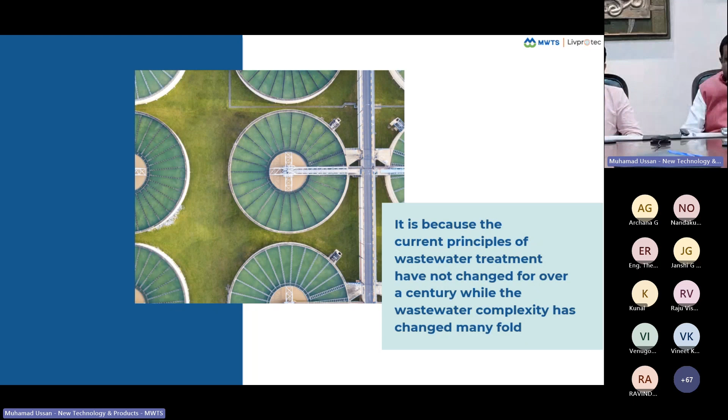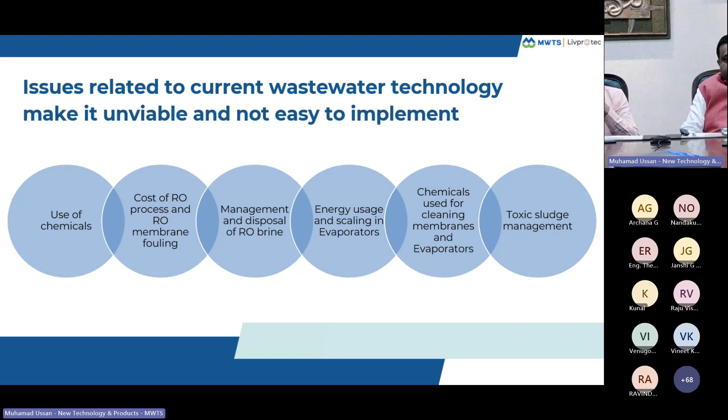So we know more about these issues related to current wastewater technology, and it is not easy to treat the wastewater. Already I have explained the complexity associated with that. In the present technologies, we use a lot of chemicals to treat the wastewater. The cost of the RO process and RO membrane fouling is the issue. Management and disposal of the RO reject is the issue today. Energy usage and scaling, a lot of energy requirement when we use the evaporators, is the issue. Chemicals used for cleaning membranes and evaporators is definitely a big issue.

And more than that, we have to manage the toxic sludge. Toxic sludge management is the issue. So there are so many issues associated with the present wastewater management. Somehow we were adopting it, because we need to achieve certain norms, we need to meet the growing statutory compliance, and also as a part of sustainability responsibility we have been doing it. But there is a way to achieve everything in a different way. That is what we are going to present.

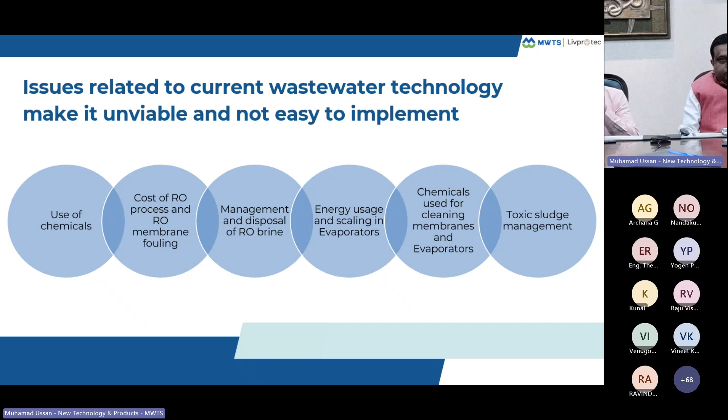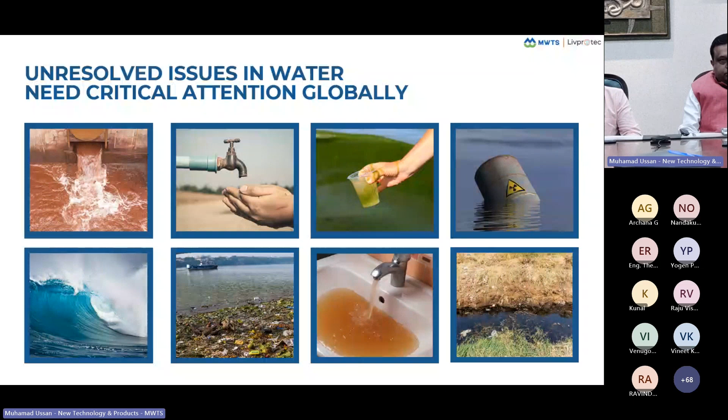So basically, unresolved issues in water need critical attention globally. That is what in one sentence we want to tell. How the critical attention can be narrowed down by means of technology, by means of science, and by means of disruption will be explained in the coming slides.

We know that the sustainability index, whatever we are talking today, water is essential for corporate sustainability. Water is the major contributor for the sustainability index when we talk about manufacturing organizations or any service organizations or the hospitality industry. In the corporate sustainability model, if you see, water is coming in almost 8 different headings. So that shows how important water is today worldwide. So everybody is inclined towards how to recover the water in a usable way.

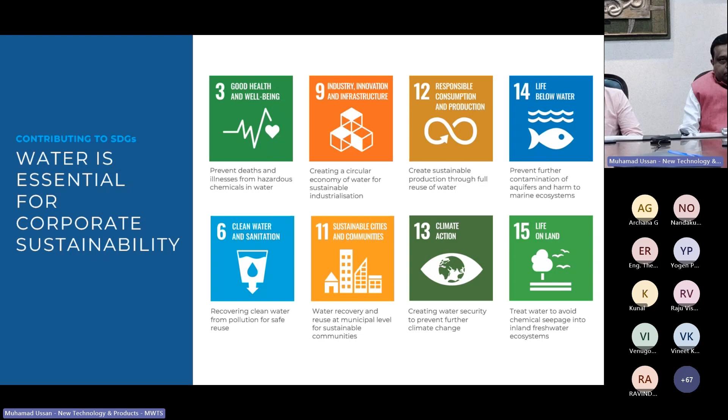So basically, it is towards achieving the corporate water goals. Water companies to pay out almost 114 million pounds after missing performance targets. We have seen a lot of penalties coming today worldwide. Not only in India, even outside countries, Western countries, US, a lot of penalties are coming on companies for not meeting the water targets or not meeting the regulatory norms. So it is going to be stricter and stricter. That is why better technology is the need of the hour.

Effective and safe wastewater treatment is one of the unsolved problems facing humanity, and can only be solved with disruption as well as innovation. That is what we are going to talk about: the solution for the one which remains unresolved. So today, whatever technology we are going to explain, this will more or less explain everything that is needed today.

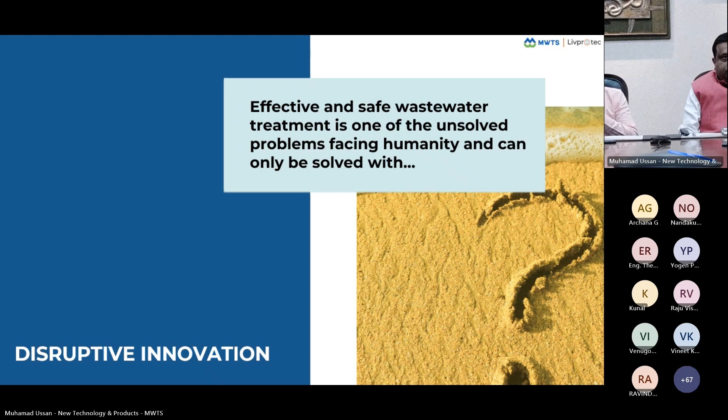So hence, we are introducing nature restorative technologies. That is called Aquatron, water recovery system, or as they rightly told, water time machine, using patented FP-STAR technology. What is FP-STAR? F means fine, P means particle, S means short wave, T means thrombotic, A means agglomeration, R means reaction. Fine particle, short wave, thrombotic, agglomeration, reaction. In total, it's a patented technology.

FP-STAR is a principle because we convert all the dissolved compounds, dissolved molecules into their elements, and these elements will lose the counterpart, that is anions, and they will become chargeless, and they will get thrombolytic. Hence, they will join together by means of van der Waals forces of attraction. That is called agglomeration. Everything is happening in a short wave frequency. That's why it is called fine particle short wave thrombotic reaction. It is a patented technology, and I will explain how it works.

Aquatron is a revolutionary technology that uses principles of physics. We invented it in the year 2017. This is the first technology which came into the world based on the physics principle. And we were ahead of time when we invented this, because everybody knew how the technology works using chemicals, or physical separation, or biological oxidation followed by reverse osmosis or evaporation to achieve ZLD. Nobody thought this particular target can be met using physics principles.

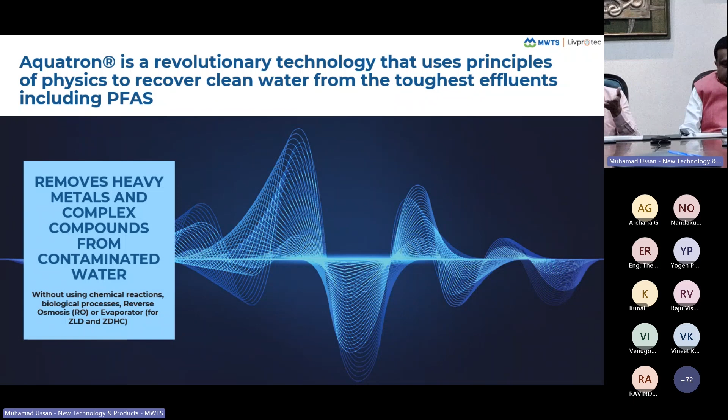I will just touch upon the principles involved in this technology in the different pictures. The entire technology is based on the principle of resonance. Why we adopted the principle of resonance is that in nature, it's a natural process. There is a frequency of association between two elements. For example, if you are getting copper sulfate in nature or iron oxide or iron sulfate in nature, it is not created by human intervention. It is naturally created by nature by means of frequency of association.

At the same time, there is a frequency of dissociation, because when we see river contamination today, the way we have contaminated the rivers for so many years, by this time no river would have been fit for consumption in any way, even after adopting any type of technology. But that is not the truth. Today, whatever river after pollution, when we measure, the TDS will not be more than 500 ppm. The COD will not be more than 50 ppm. How does it happen? It's called the self-assimilation capacity of the river. There is a technology, nature's technology, which is continuously working to clean the water on its own.

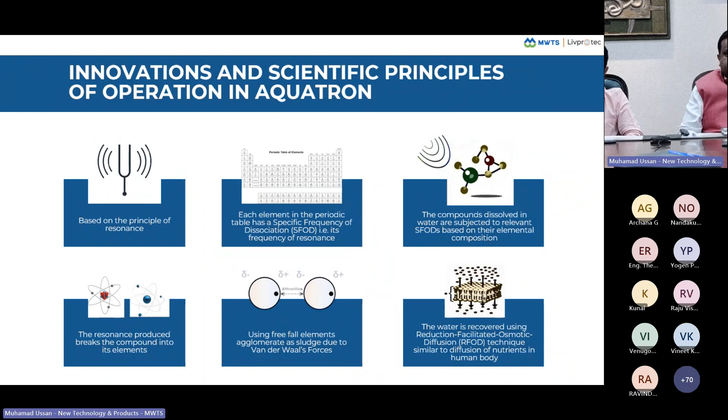So we will explain what a typical effluent treatment plant looks like using this technology in the coming slides. Yeah, just one, Doctor. So again, what we are seeing here is the slide which talks about the core of the technology, because we all know the challenges of contamination of water across different streams, whether it is river, lakes, or groundwater, or even seawater. So again, this is very basic elemental physics. This is nothing rocket science or out of the world.

Only thing is the IP or the patent is mastering or mimicking the laws of nature into a commercially offerable solution. That is how I would put Aquatron or water time machine, whether it is RFOD or van der Waals forces. This principle has been there across different applications. So nothing that this whole technology has invented. We have used what has already been there, and how do we provide it to the industries or to the communities at large, for different applications. Like I said, this is a platform technology.

Many times we are asked whether this is okay for this application or that application. I would put it this way, that the Aquatron or water time machine, like the river, doesn't discriminate. It just follows the simple basic laws of physics. Physics is the same in India or elsewhere, right? So the machine will only look at what is the contaminant I need to dissociate, and it will continuously, consistently work.

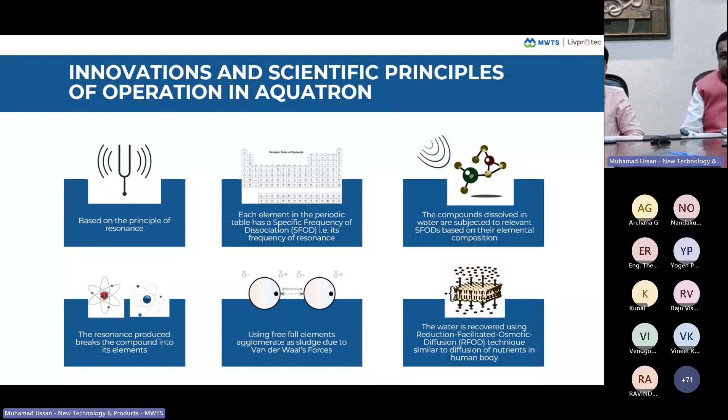At times it's boring because it doesn't give you the challenges of high pressure in RO, a feed pressure increase or a membrane failure, or, like doctor mentioned, the scaling in the evaporator, but this consistently delivers high quality ORP negative pristine water. So that's a beauty. So doctor, again. Yeah, I definitely agree with you.

Next slide. So here we try to explain what happens inside the resonating column when we send the frequency of dissociation, in three different pictures. All three happen at a time in the same resonating column, but we are differentiating them in pictures. So the Aquatron process removes all dissolved impurities and delivers ZLD and zero discharge of hazardous chemicals without using multi-effect evaporator or RO process. This is the definition of our Aquatron. So how the principle takes place in a resonating column in three different ways.

The first one is contaminated water which goes inside the resonating column, contaminated due to dissolved compounds. It may be organic or inorganic compound or a pathogen. They are all dissolved compounds. Based on the elemental analysis of this effluent, we fix the frequency of dissociation, and we send these frequencies into the water with the help of antenna. There are 12 sets of antenna in each tower. It is just like a TV antenna. It will receive the frequency, because the frequency we operate is short wave, and send these frequencies into the water.

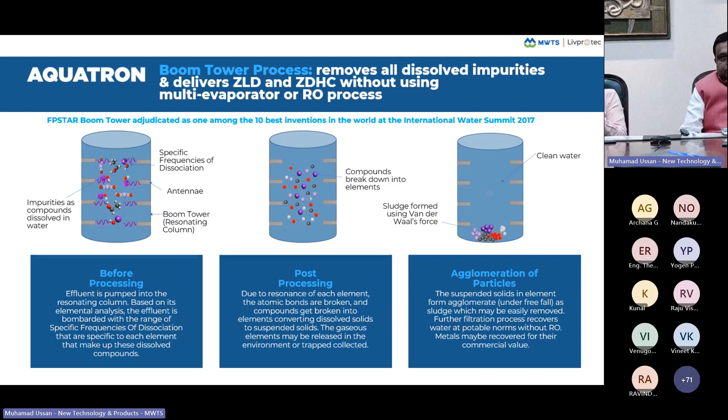They are all what we call inorganic elements or inorganic chemistry elements. These compounds will be broken down into the elements, and these elements, as told in the previous slide, basically lose their weight and become weightless. Due to the van der Waals force of attraction, they attract each other temporarily and start settling. Settling means they need filtration. If they are clogged, it can be filtered out; if not clogged, they cannot be filtered because they are very fine particles, so they need agglomeration. Once agglomerated, it can be easily filtered out.

So as Jay was telling, this technology is a platform technology. It doesn't discriminate which type of effluent is coming, which type of industry we are talking about, whether it is seawater, sewage, industrial effluent, or groundwater treatment for contamination of heavy metals. We are not worried about that, because whatever chemical contamination we talk about today, they are part of this periodic table. So we know the periodic table, and we can produce all the frequencies for all the elements present in it.

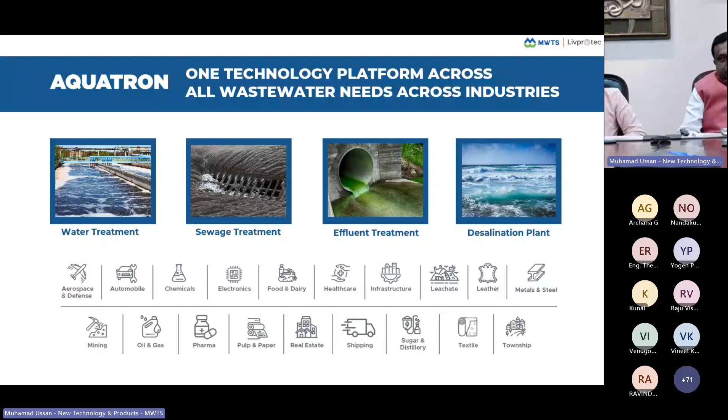Hence, we can treat any type of effluent coming from any type of industry in the world today, or any hospital, service industry, hotels, sewage, or even desalination. Even for desalination, we will explain how our technology works in a very different way compared to present desalination technologies.

So when we talk about Aquatron or FPSTAR technology, it is not only about meeting the regulatory norms. Anybody who is adopting this technology will have double benefits. One, no doubt, everybody has to meet the law of the land regulatory norms. Other than that, they can achieve circular economy of water. It is a pioneer circular economy of water, because whatever water you send into the Aquatron, you get the total quantity of water back after recyclation. So the entire water can be reused and recovered. In most cases we produce IS 10500 standard, what we call at par with WHO standard.

It is pristine drinking water, potable water. I will talk about the ORP negative, oxidation reduction potential negative water. This is maybe the cheapest way of producing ORP negative water. If we had to produce exclusively ORP negative water, we would have spent a lot of money, but here it happens on its own. That is the main effect, or a side effect, whatever we define it as. That is the beauty of the technology.

This is the only technology that removes heavy metals and hazardous chemicals with ease. Today we know we have to remove heavy metals or hazardous chemicals, and it is very, very difficult. We have to spend a lot of energy, a lot of technologies, a lot of complications in the operational area, as you will see. But here it can be removed very easily, in a very simple way.

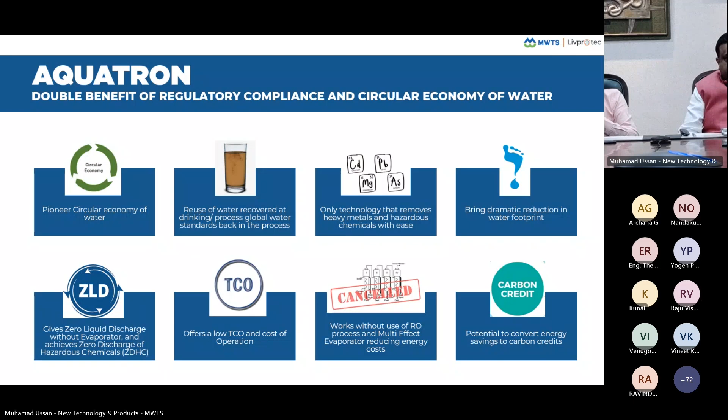So it brings dramatic reduction in the water footprint. It gives zero liquid discharge without the help of RO principle or evaporation. Because this technology runs at very low energy, it offers a low total cost of ownership and cost of operation. Suppose somebody runs this plant for 3 to 4 years, they would have gained all the benefits in terms of carbon credits, operational efficiency, meeting regulatory norms, and meeting sustainability index and global norms. All these things can be addressed with only one treatment technology.

It works without use of RO process and multiple effect evaporator, hence there is a very high level of reduction in energy cost. And as I already told, there's potential to convert energy savings to carbon credits. That is the biggest advantage in this technology.

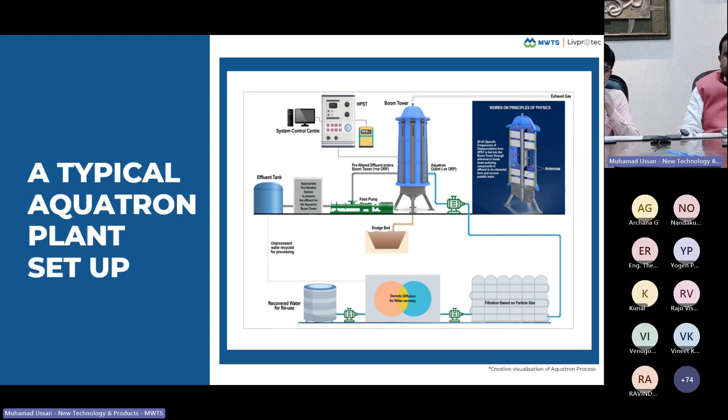So with all this, the approach - again, what we are talking about when we say we don't require an evaporator or conventional separation processes - is simply because, in layman's language, the Aquatron water time machine converts TDS to TSS. That's the easiest and shortest way to explain this. When we say TDS to TSS, that is why it is converted to elemental form.

So this is just a comparison, based on our experience. You could see, like Dr. explained, significant reduction. What we have done is compared FP Star or Aquatron water time machine, the highest in terms of numbers, whether power or otherwise, versus the possible lowest among existing approaches to different challenges. We compared it to multiple effect evaporation, though there are multiple other advancements also. So this is just for academic purposes in terms of what we have done.

But practically also you could see that, like we explained, this is the only technology which uses the principles of physics. The most important thing we have seen is what we call out-of-box thinking. That word has become cliched, people just throw it around without understanding what out-of-box really means. But I would say FP Star, or water time machine Aquatron, is a completely new box. Because out-of-box normally would mean using chemical, biological, biochemical, or some green chemistry approach to solve the unsolved problem. But we are completely changing that because we are using the principles of physics. That is how I would put it.

And again, the operating cost — because we don't have any chemicals to use, the only utility we use is power, and that depends on the power cost, which can vary from different countries or geographies. Again, in terms of area, we don't require much. The other important thing here is there are three things we would bring to the attention of everyone.

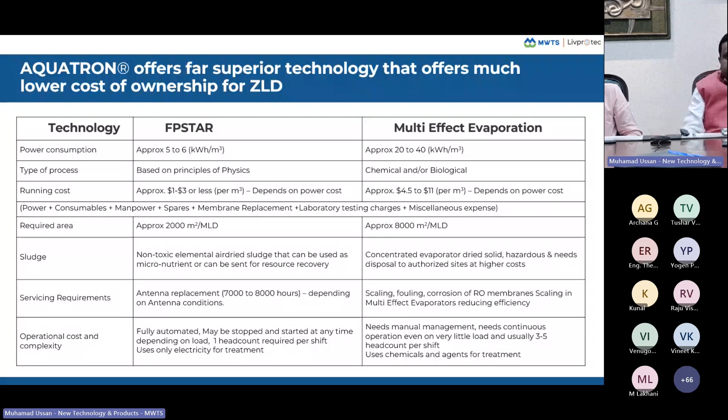This is a continuous plant running. There are two plants we have already installed in Bangalore, India, and they are running perfectly. Leachate is otherwise a very difficult effluent to treat with conventional technologies, but we are treating it within 1.5 hours. The water which enters the plant will be treated within 1.5 hours. That is the beauty.

In conventional technology, even a small, very mild effluent will take around 18 to 20 hours to achieve zero liquid discharge. That is the difference. That's why conventional technology needs a large space, whereas here we need very small space. This can be implemented or installed even on the terrace, in the car parking area, in the minus level of an apartment, in a tech park where they want to treat sewage effluent, or even in industries where they want to treat it at the site.

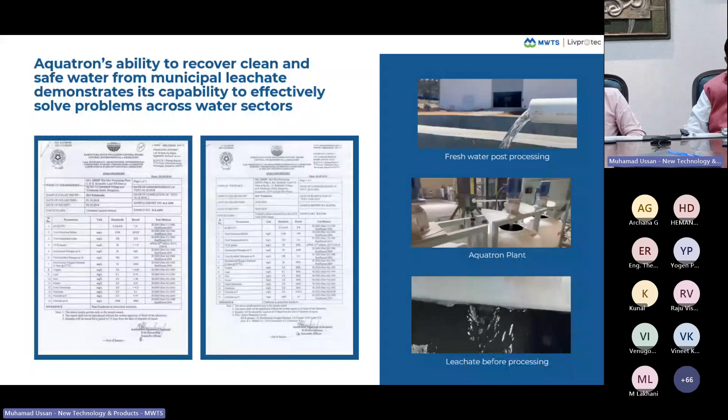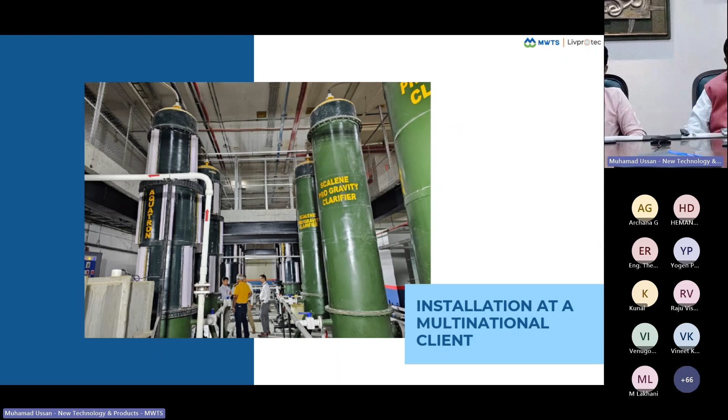So this is a typical - one of the old models. I can say now a lot of design changes have happened. This is an installation at a multinational client in Bangalore. This is how it looks, a 300 KLD plant. It's a very small area, 2,800 square feet. We installed a 300 KLD plant, and it consumed almost 2,800 square feet area, only in the -3 level.

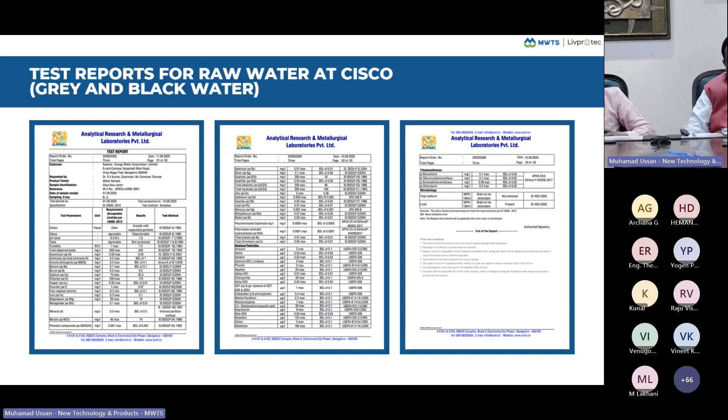This is the test report for raw water at the Cisco plant, especially the gray and black water, that is sewage. It's very difficult to read from here, but we will provide it to whoever is interested.

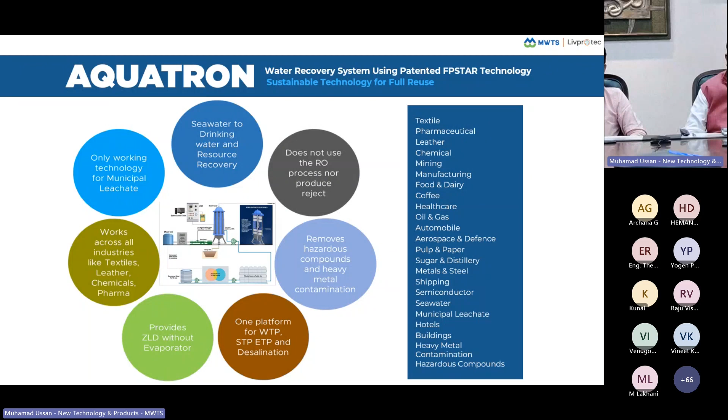So Aquatron, as Jay already told, is a platform technology, hence it's the only working technology for municipal leachate. Seawater to drinking water and resource recovery can be achieved using this technology. It doesn't use the RO process nor produce reject, so it removes all types of hazardous compounds and heavy metals. It's one platform for water treatment, sewage treatment, effluent treatment, and desalination. It provides zero liquid discharge without evaporation and works across all industries like textiles, leather, chemicals, pharma, etc. When we started, we claimed this, and we are again claiming the same thing - one technology can be adopted anywhere based on simple elemental analysis. Thanks.

ORP negative water will be rich in OH minus radicals. All the elements, especially group 1 and group 2 elements, in the final water will be in hydroxide form. That means even silica will not be there. When we produce the DM water, there is no anion load. When anion load is not there, degasification is not required, and resin regeneration with caustic soda is not required. So it's not only the cost of those chemicals, it's also the impact on the environment - we will not be producing wastewater, we will not be producing chemical waste.

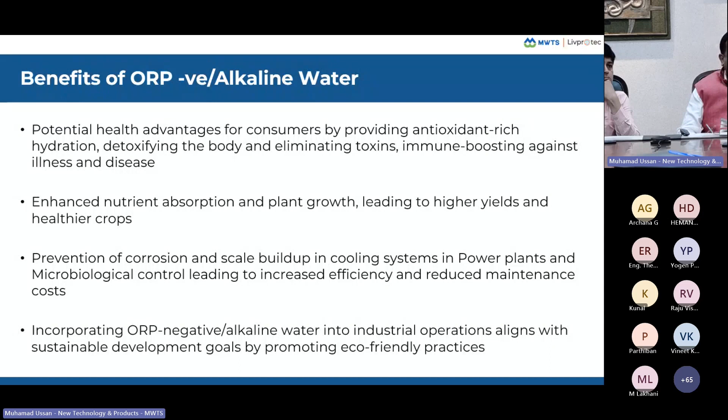And the energy drinks - many of us today are literally used to energy drinks and multiple drinks. ORP negative water significantly reduces the impact. I'm not saying you will not have the negative impact, because anyway, whatever is there with those colas and other things, we all know the challenges with that. But what we are trying to ascertain or put forward is the real benefits in the real world.

Let's take a steel mill. Imagine the impact of ORP negative water on the surface property or surface chemistry of steel, whether it's carbon steel, mild steel, or stainless steel, because that would significantly strengthen the steel through enhanced bonds and surface chemistry, much more enhanced by utilizing ORP negative or alkaline water. And if I take a distillery, although it produces alcohol for whatever reason, the usage of ORP negative water would significantly improve the yield of alcohol production. So there are multiple real life benefits which could be explored.

One important thing is even drug delivery. When we say drug delivery, today we know, like doctor was saying, today's sewage is not the same sewage as it was 20, 40, 50 years back. Especially post-COVID, the intake of medicine has gone up significantly because of the pandemic. But imagine with ORP negative water, because it's devoid of anions, if the doctor has advised 100 milligrams of a certain antibiotic or drug, with ORP negative water I could still get the same efficiency with a reduced concentration of the drug.

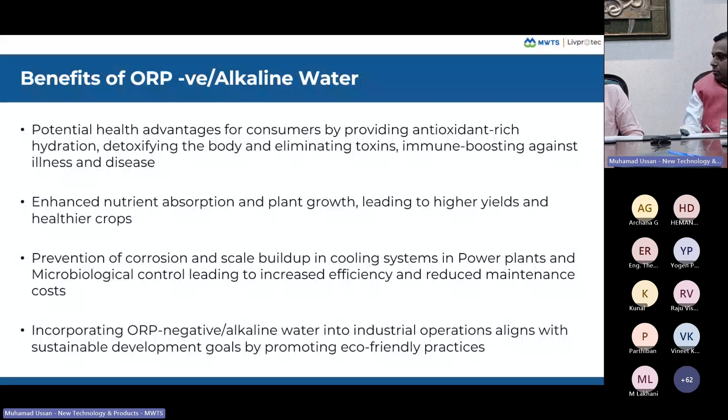So far we have seen the Aquatron for industrial effluent treatment or sewage treatment or even groundwater treatment. The same principle, when it is applied to ocean water, to seawater, for the purpose of converting seawater into drinking water, how does it work? What is the advantage of that? How can the potential of seawater be tapped? How can the seawater resources be recovered?

Though seawater mining is banned today, we are not going to mine it. We are going to produce drinking water from seawater. But as a byproduct, what are the benefits we are going to have? I will explain in the coming slides. So this is the same principle. It will convert seawater into drinking water.

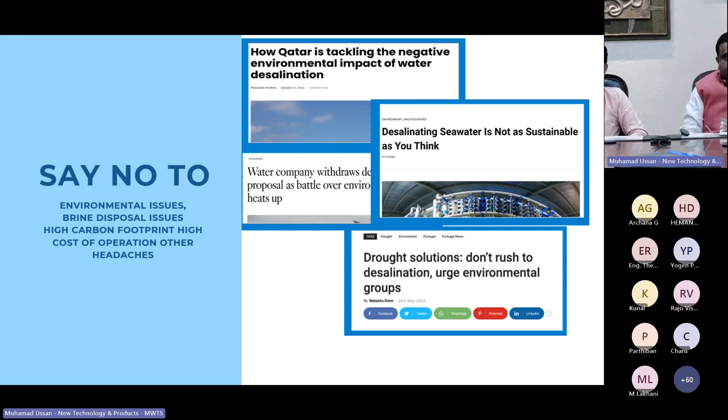So I will just take you through a quick comparison, the superiority of Oceantron over existing technology. I have compared it with seawater RO, the present technology. Our technology is based on FPSTAR. The principle I have explained: it is dissociation of dissolved compounds, and the process is based on physics. We don't use chemicals. Power requirement is 18 to 20 kilowatt hour per meter cube, inclusive of sodium hydroxide and chlorine recovery. Why sodium hydroxide? We don't dissociate sodium in the water because sodium as an element can catch fire in water.

So we do not dissociate the sodium, but when we dissociate the chlorine, the chlorine will go into the atmosphere, which has to be recovered, no doubt. And the beauty of this technology is that sodium will attach to OH minus to produce the equivalent quantity of sodium hydroxide. Water recovery is around 80 to 90% at IS 10500 standard. I'm talking about the Indian standard, but it is at par with WHO drinking water quality. Treated water ORP is negative, whereas seawater RO will still produce positive ORP, and it will meet only around 50 to 60% of WHO standard in terms of quality.

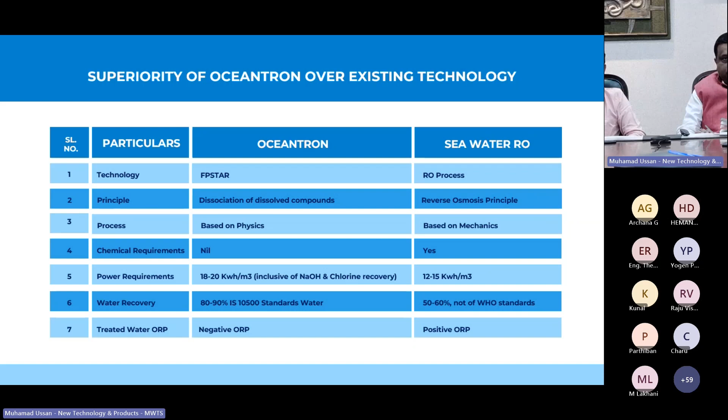Next slide. We do not produce any reject, whereas in RO treatment around 40 to 50% goes back to the sea, impacting the sea ecosystem. Hence we do not impact any ecosystem, whereas RO reject will. Resource recovery is the beauty of this technology. We can recover rare earth elements present in seawater, in addition to caustic recovery and chlorine recovery, whereas in seawater RO we cannot recover anything because all the RO reject goes back to the sea.

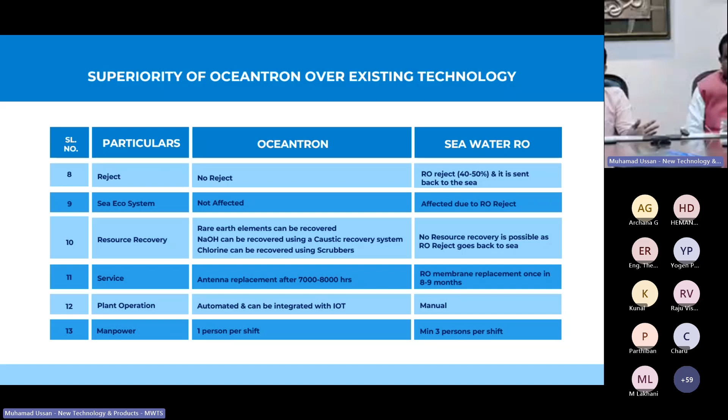Antenna replacement is as usual with the Aquatron. Plant operation is automated and can be integrated with IoT. For manpower, whatever the size of the plant, we need only one person, like a pilot is required to run the flight. This is the beauty of this technology compared with seawater RO. It works on the same resonance frequency principle I already explained for the Aquatron, applied to seawater desalination.

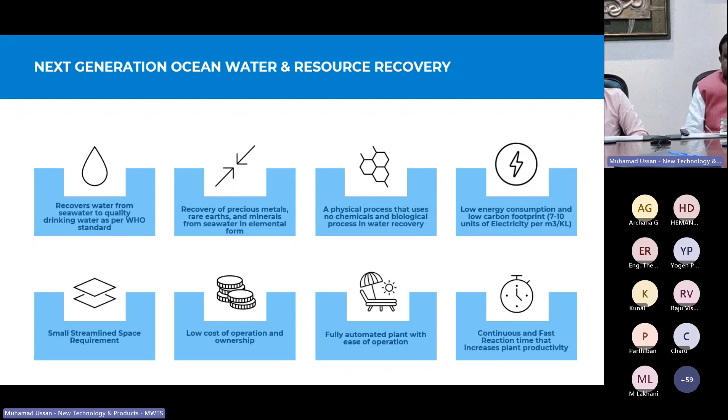We are the only technology proven for groundwater heavy metal removal, as well as metallic effluent treatment and municipal leachate. These are all tough effluents which we have treated. Next. Yep. So this is what the technology is about. We are very happy